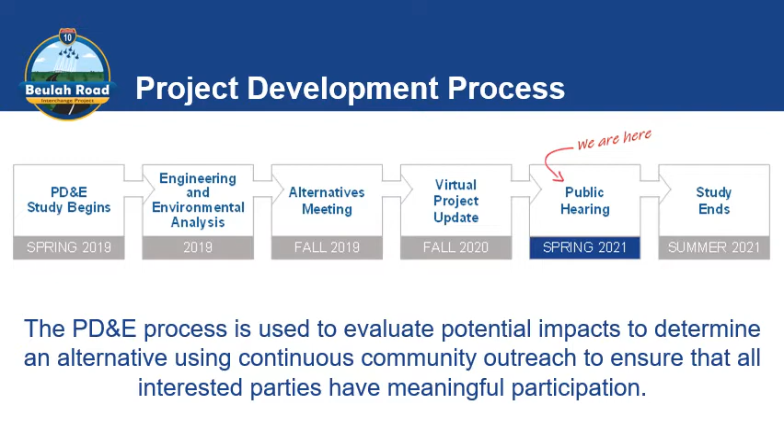FDOT is conducting a Project Development and Environment, or PD&E, study for this project. The PD&E process is used to evaluate potential impacts to determine an alternative using continuous community outreach to ensure that all interested parties have meaningful participation. Public input and information received at the hearing will be taken into consideration when preparing the final documents for this study.

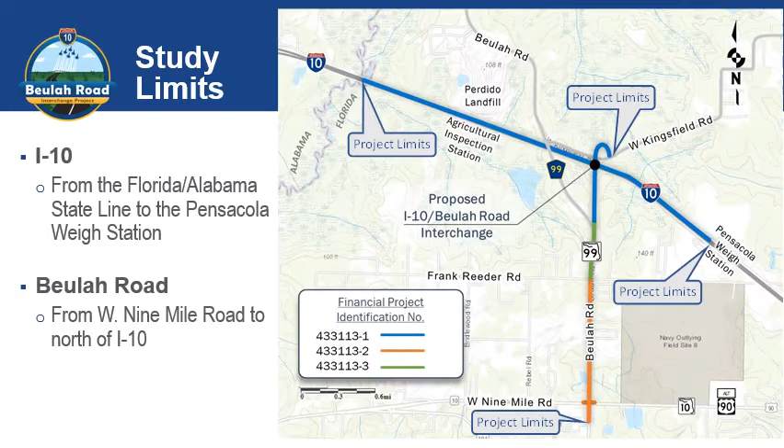This project is consistent with local transportation plans, including the Florida-Alabama Transportation Planning Organization 2045 Long-Range Transportation Plan, the Transportation Improvement Program, or TIP, State Transportation Improvement Program, or STIP, and other regional plans.

The purpose of the project is to improve regional connectivity and mobility. Secondary purposes are to reduce congestion on adjacent roadways, decrease commuter trip lengths, and enhance emergency evacuation by providing an additional connection to I-10. The project need is driven by increased traffic demand resulting from current and future land development within the project area.

As a result of this growth, there is a need to provide connectivity from these new areas of development to the surrounding regional transportation system. Additionally, there is a need to provide an alternative route to reduce travel times and congestion while also providing route choices for hurricane evacuation within the study area.

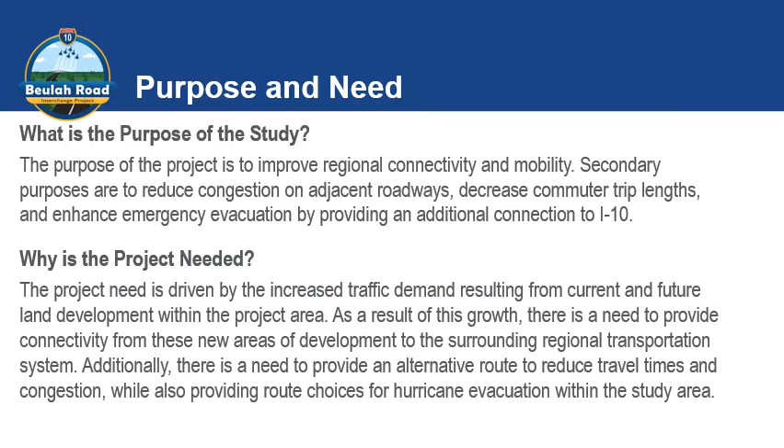Build alternatives and a no-build alternative were evaluated as part of this PD&E study to meet the project purpose and need, as well as minimize impacts to the natural and built environment within the study area. The no-build alternative assumes no improvements are made and does not meet the project purpose and need. However, it does provide a baseline condition against which to compare and measure the effects of the build alternatives.

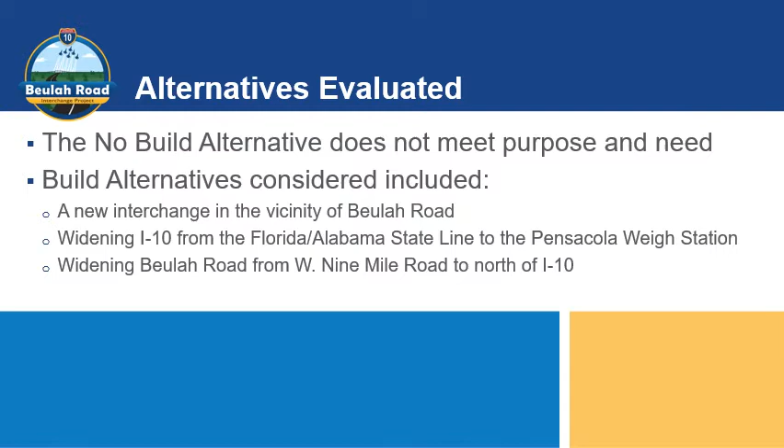A detailed comparison of the build alternatives is provided in the preliminary engineering report and the environmental document.

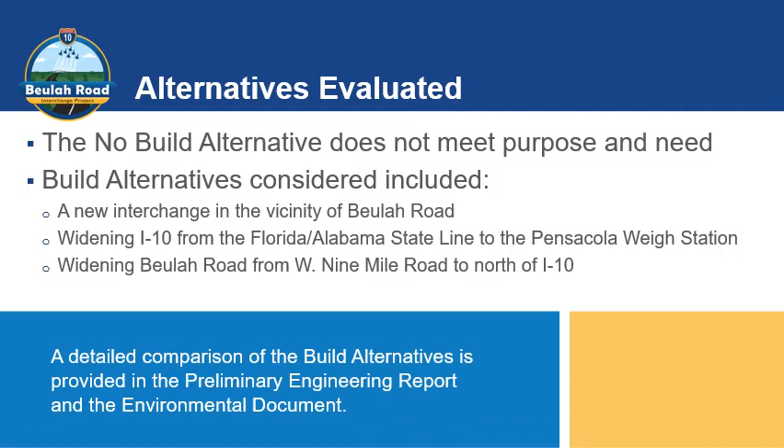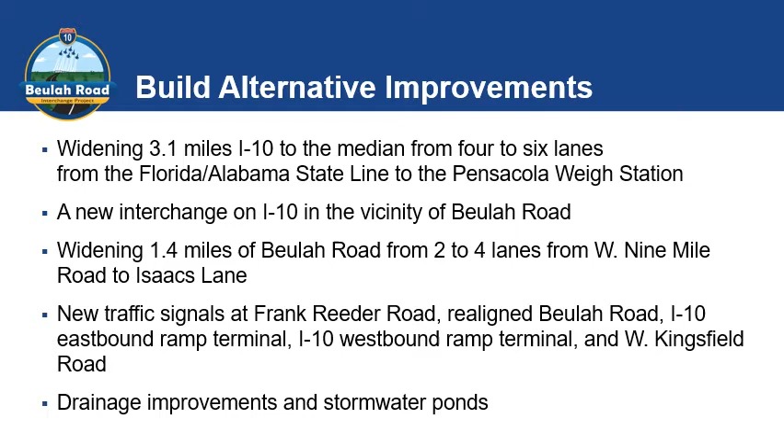The build alternative improvements include widening 3.1 miles of I-10 to the median from 4 to 6 lanes from the Florida-Alabama state line to the Pensacola Weigh Station, a new interchange on I-10 in the vicinity of Beulah Road, widening 1.4 miles of Beulah Road from 2 to 4 lanes from West 9 Mile Road to Isaacs Lane, new traffic signals on Beulah Road at Frank Reeder Road, realigning Beulah Road, the I-10 eastbound ramp terminal, the I-10 westbound ramp terminal, and West Kingsfield Road, and drainage improvements and stormwater ponds.

The preferred alternative for I-10 would be to widen 3.1 miles of I-10 from 4 to 6 lanes from the Florida-Alabama state line to the Pensacola Weigh Station.

A typical section is a visual representation of what the new roadway would look like. The widening of I-10 from 4 to 6 lanes would occur toward the median, adding a 12-foot lane sloped to the inside in each direction with 12-foot shoulders, of which 10 feet would be paved. The existing lanes and outside shoulders would be resurfaced and would remain sloped outward. The design speed is 70 miles per hour.

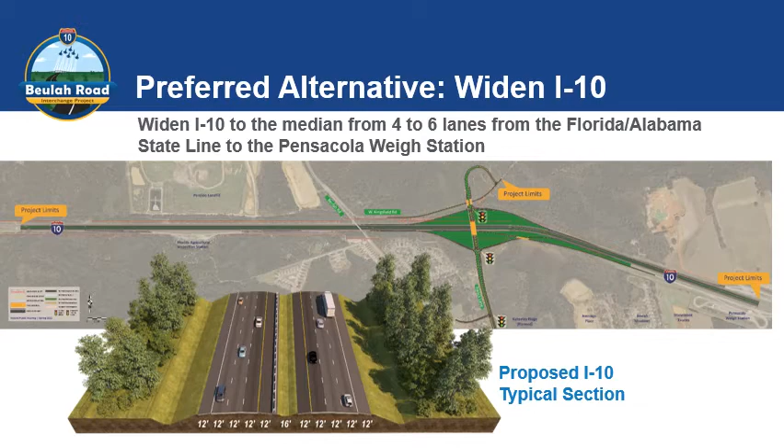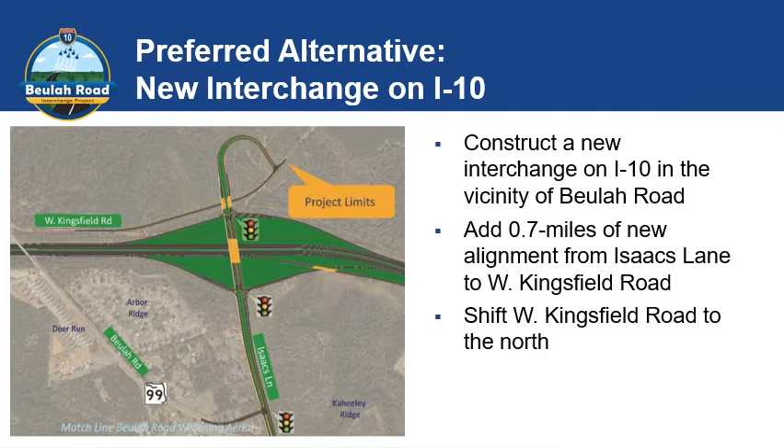The proposed new interchange on I-10 would be constructed in the vicinity of the existing Beulah Road overpass. A 0.7-mile section of new alignment for the Beulah Beltway would be added from Isaacs Lane through the new interchange and terminating at West Kingsfield Road. The new Beulah Beltway alignment would feature 4 11-foot lanes, a sidewalk along the west side, and a shared-use path along the east side. West Kingsfield Road would be shifted to the north to avoid conflicts with the proposed interchange.

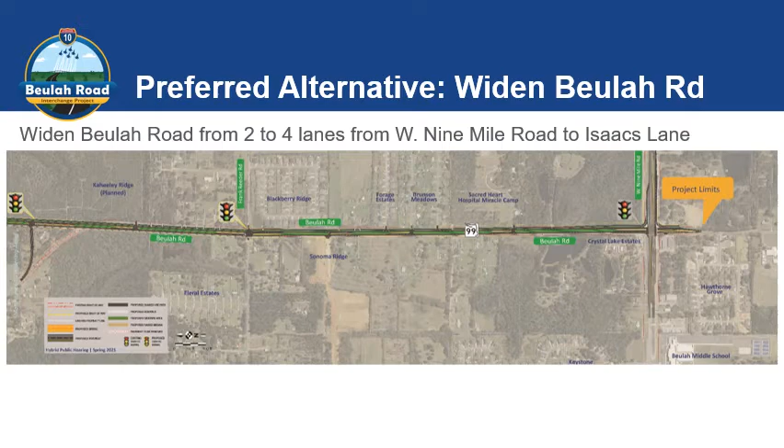The preferred alternative for Beulah Road would be to reconstruct and widen Beulah Road from 2 to 4 lanes from West 9 Mile Road to Isaacs Lane. The proposed Beulah Road typical section from West 9 Mile Road to West Kingsfield Road, a distance of 2.1 miles, would be a 4-lane divided principal arterial with raised medians, curbs and gutters, a 6-foot sidewalk along the west side, and a 12-foot shared-use path on the east side. Other pedestrian features such as crosswalks and pedestrian crossing signals would also be provided along Beulah Road.

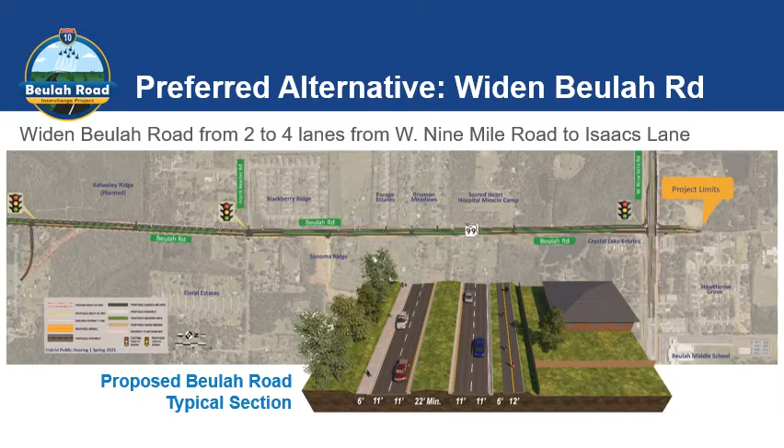Intersection improvements on Beulah Road would include adding turn lanes at West 9 Mile Road and Frank Reeder Road. This section of Beulah Road has a context classification of C3C suburban commercial, and the design speed is 45 miles per hour. An important element of this PD&E study was to evaluate the potential project impacts and benefits.

One of the unavoidable consequences on a project such as this is the necessary relocation of families or businesses. On this project, we anticipate the relocation of 4 residential properties and no businesses. All right-of-way acquisition will be conducted in accordance with Florida Statute 339.09 and the Federal Uniform Relocation Assistance and Real Property Acquisition Policies Act of 1970, commonly known as the Uniform Act.

If you are required to make any type of move as a result of a Department of Transportation project, you can expect to be treated in a fair and helpful manner and in compliance with the Uniform Relocation Assistance Act. If a move is required, you will be contacted by an appraiser who will inspect your property. We encourage you to be present during the inspection and provide information about the value of your property.

You may also be eligible for relocation advisory services and payment benefits if you are being moved. If you are unsatisfied with the department's determination of your eligibility for payment or the amount of that payment, you may appeal that determination. You will be promptly furnished necessary forms and notified of the procedures to be followed in making that appeal.

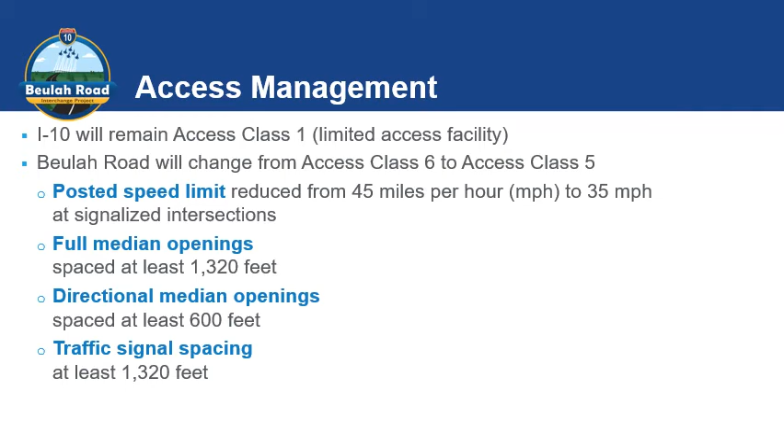The addition of medians on Beulah Road will result in access management changes. Currently, Beulah Road is a 2-lane road with no medians and is classified as Access Class 6. Considering the facility design features, proposed speed limits, and existing land use adjoining the roadway, Access Class 5 has been recommended for the proposed 4-lane Beulah Road.

The proposed posted speed limit on Beulah Road is 45 miles per hour, reduced to 35 miles per hour at the signalized intersections at West 9 Mile Road, Frank Reeder Road, and through the interchange to West Kingsfield Road. The proposed Access Class 5 is consistent with the facility design features of the improved roadway along with existing and future development.

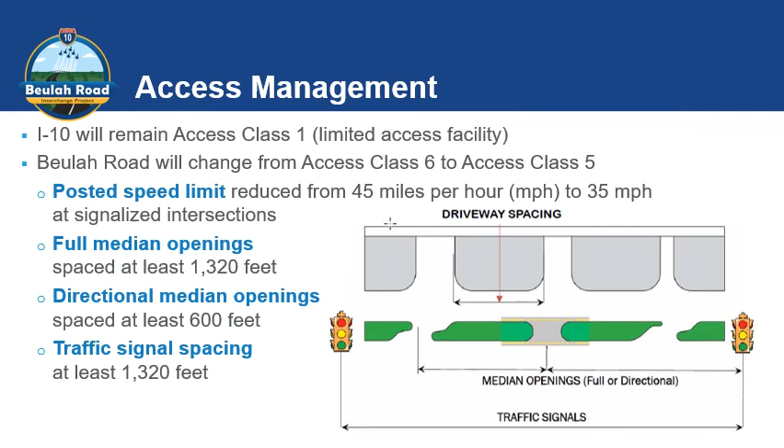The access management classification and standards for arterial roads are: full median openings will be spaced at least 1,320 feet apart. Directional median openings will be spaced at least 600 feet apart, and traffic signals will be spaced at least 1,320 feet apart.

The transportation development process for this project began with a feasibility study. We are currently completing the PD&E study, and preliminary design is in progress. This will be followed by final design and right-of-way and the construction phase. The project is currently funded for the PD&E and design phases.

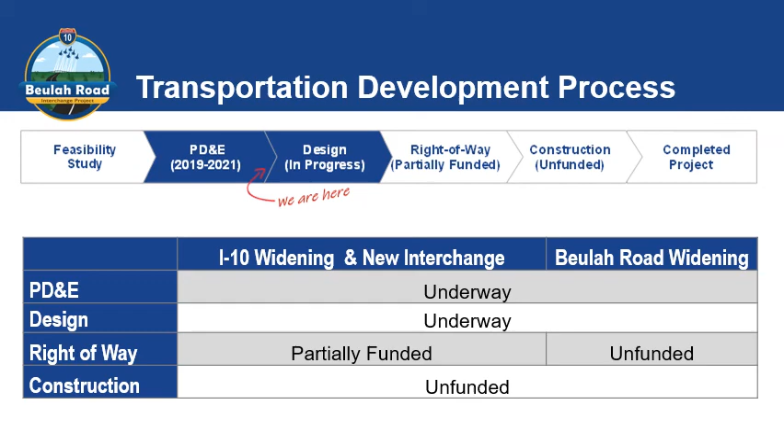This concludes the formal presentation. We will now begin the public comment period of the public hearing.

The next step is to incorporate your input on this public hearing into our decision-making process. After the comment period closes and your input has been considered, a decision will be made and the final PD&E document will be sent to the FDOT Office of Environmental Management, which, based on the Memorandum of Understanding signed with the Federal Highway Administration on December 14, 2016, has approval authority on this project, granting location and design concept acceptance.

Please note that we will not respond to your comments and questions today, but we will respond in writing at a later date.

Anyone desiring to make a statement will now have the opportunity to do so. There are multiple ways you may provide your comments tonight: written, verbally, or online.